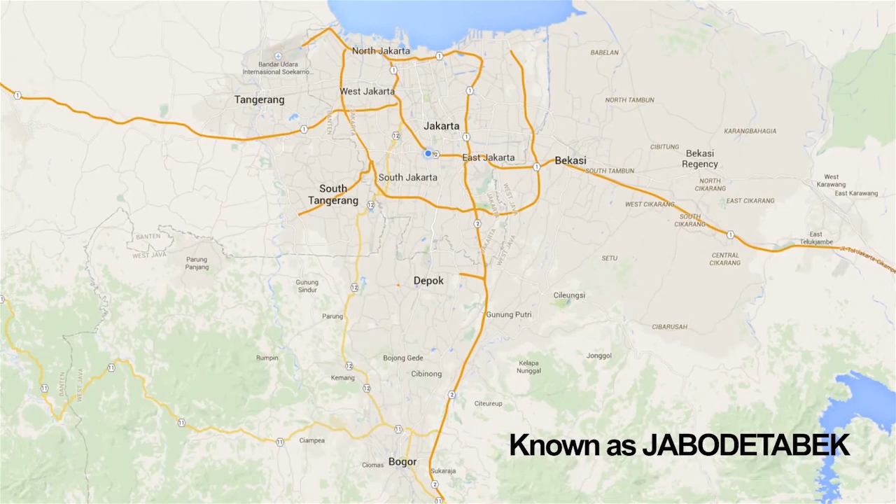It is the most populous city in Indonesia and in Southeast Asia, while the Jakarta city area is 664 square kilometers. Known as Jabodetabek, a name formed by combining the initial syllables of Jakarta, Bogor, Depok, Tangerang, and Bekasi, it is the second largest in the world. Yet the metropolis's suburbs still continue beyond it.

With 28 million people in the metropolitan area, nearly 10 million vehicles in daily use, and a limited rapid transit system, Jakarta is strained by transportation problems. The alternative solution to Jakarta's transportation problem shall be providing mass rapid transit that is environmentally friendly and

powered by electricity. By adopting the system utilized in other countries such as Singapore and Japan, the Government of DKI Jakarta established the organization that is fully responsible for all activities, from engineering service and construction through operations and maintenance. The organization is PT Mass Rapid Transit Jakarta.

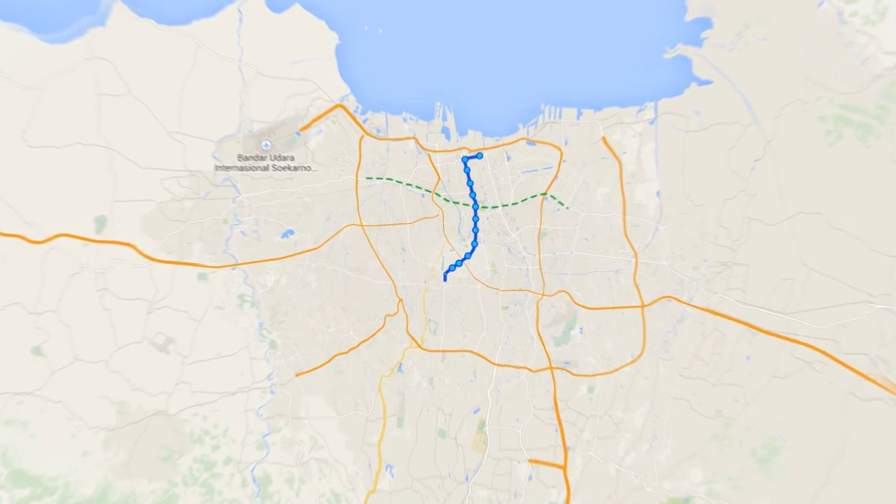Rail-based MRT Jakarta will stretch over 110.8 km of Jakarta roads, consisting of a South-North corridor of about 23.8 km and an East-West corridor of about 87 km. This project is funded through a STEP loan by JICA and includes the first subway line in Indonesia.

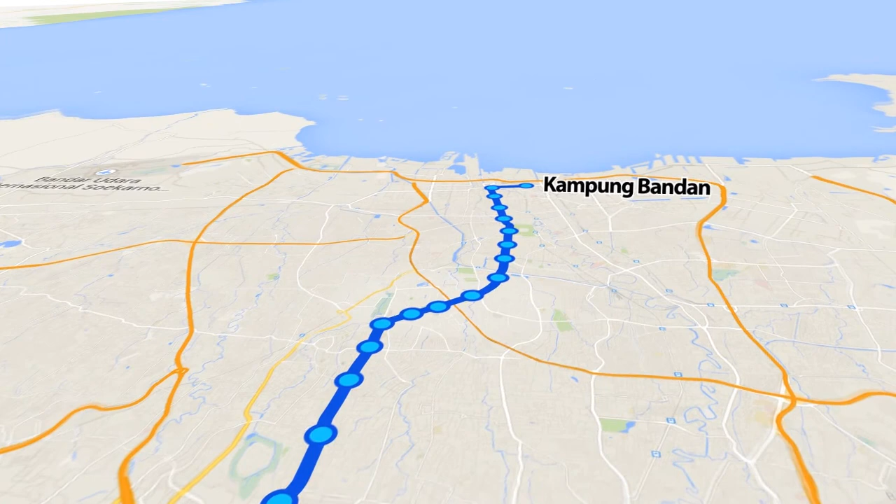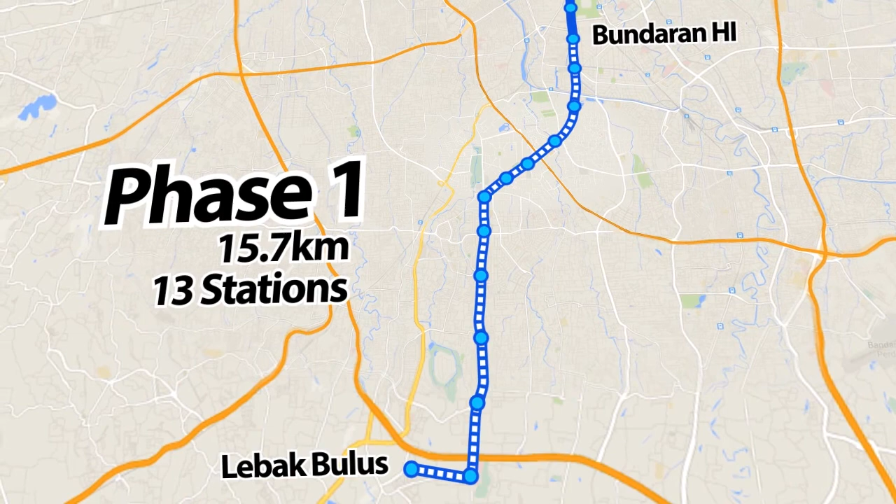The construction of the South-North corridor that stretches from Lebak Bulus to Kampung Bandan will be carried out in 2 phases. Phase 1 will connect Lebak Bulus with Bundaran HI over a 15.7 km railway with 13 stations, 7 elevated stations and 6 underground stations, which is targeted to operate by 2018.

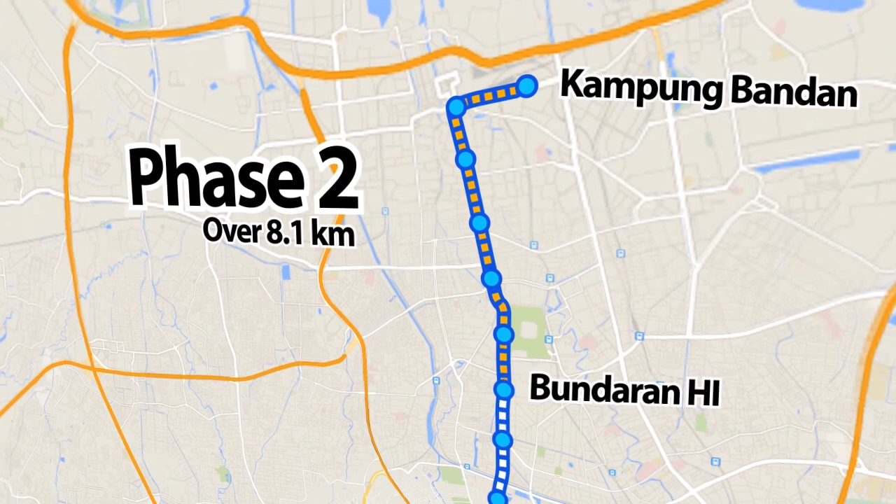Phase 2 will expand the South-North corridor from Bundaran HI to Kampung Bandan over an 8.1 km railway, whose construction will have been initiated before Stage 1 operates. The construction of MRT-J Phase 1, which includes 13 stations and 6 packages, has commenced since August 2013.

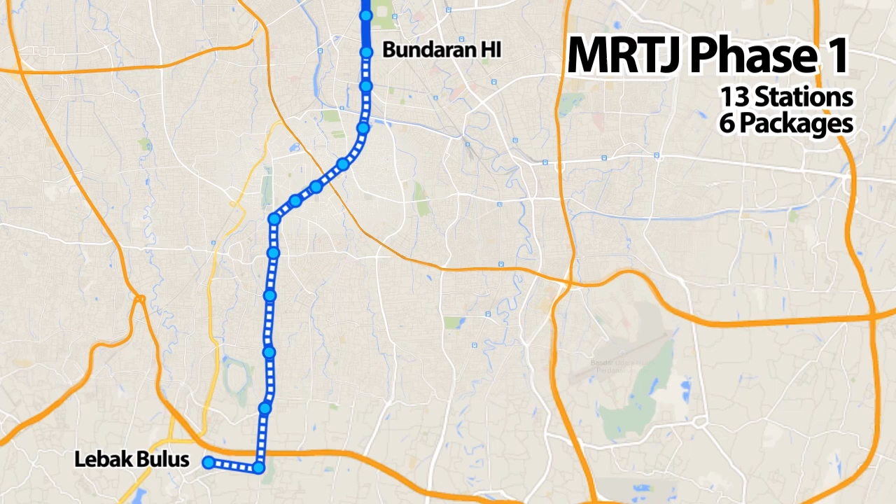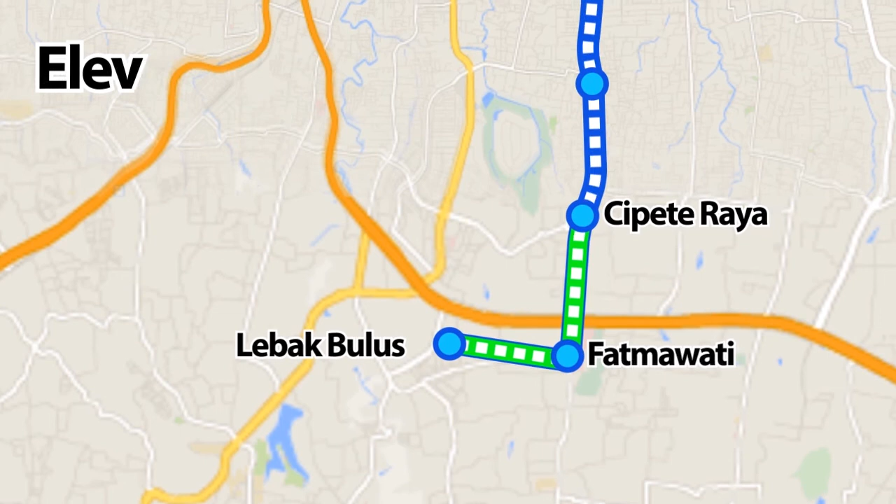Elevated packages CP101 and CP102 consist of Lebak Bulus, Fatmawati, and Cipete Raya stations along 5.95 km. Elevated package CP103 consists of Haji Nawi, Blok A, Blok M, and Sisingamangaraja stations along 3.84 km.

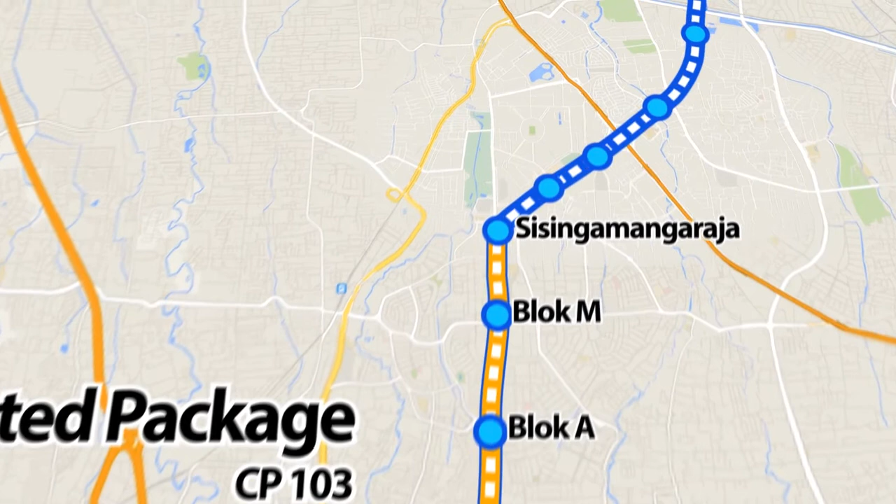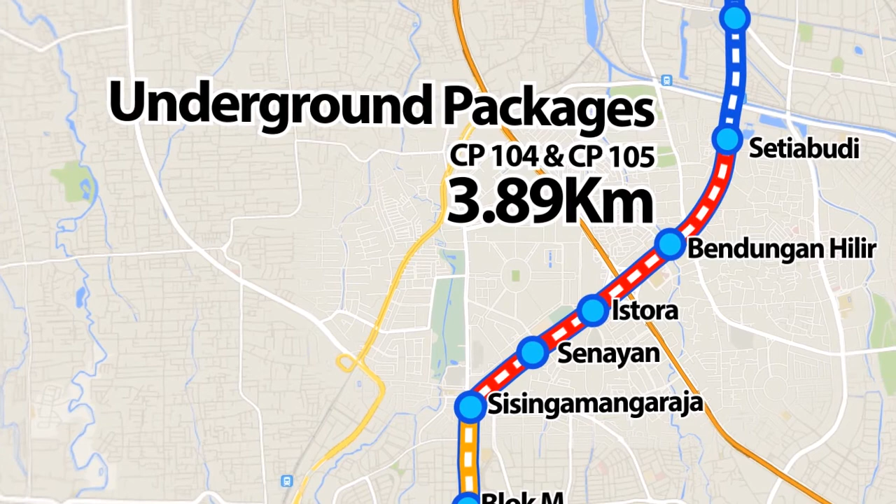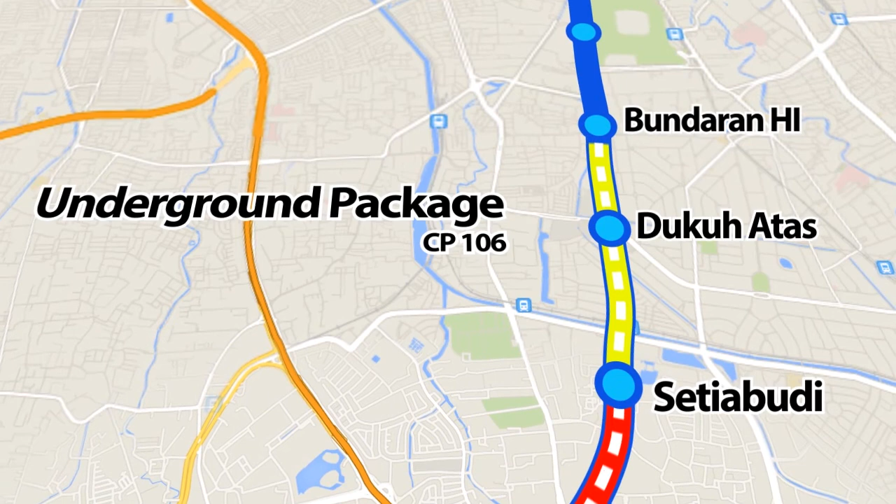Underground packages CP104 and CP105, consisting of the transition area, Senayan, Istora, Bendungan Hilir, and Setiabudi stations along 3.89 km, are carried out by Shimizu Obayashi Corporation from Japan, and Wika and Jaya Konstruksi from Indonesia. Underground package CP106 consists of Dukuh Atas and Bundaran HI stations along 2.02 km.

SOWJ is the abbreviation of the Shimizu Obayashi Wika and Jaya Konstruksi joint venture, which constructs the CP104 and CP105 packages. Those packages are underground packages that include transition area, station and tunnel construction with a total length of 3.89 km.

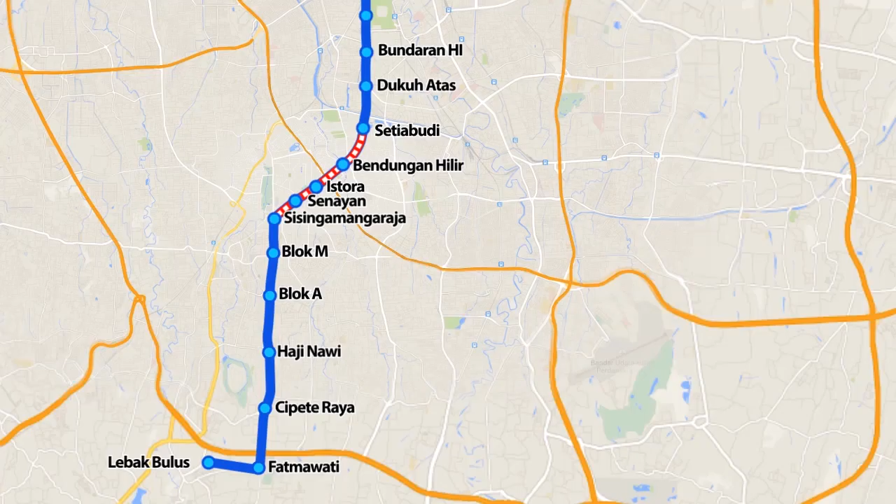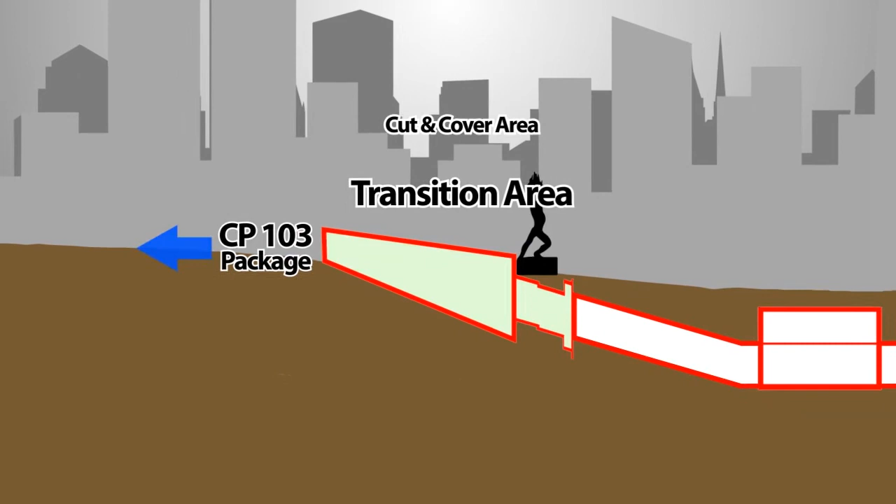The transition area, or cut and cover area, will be located from Sisingamangaraja Road to Bundaran Senayan along 460 meters. This area is a transition from the elevated structure of the CP103 package to the underground structure of the SOWJ packages, which will be constructed by the soldier piling method.

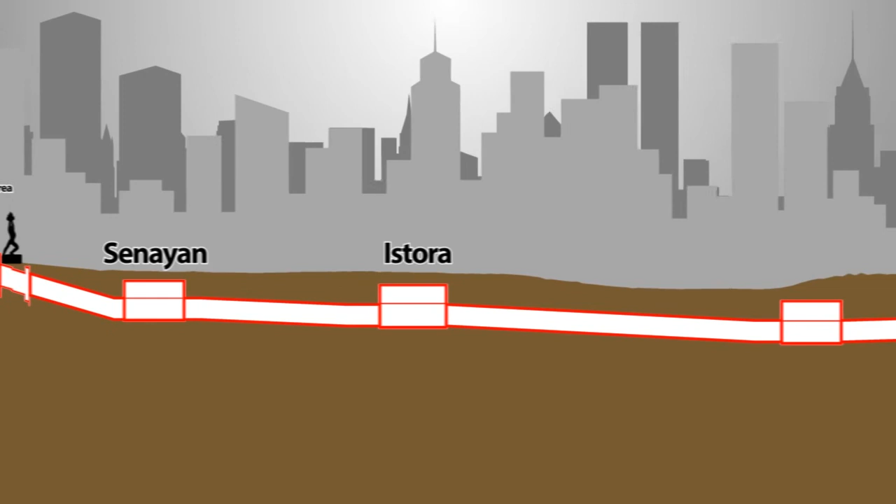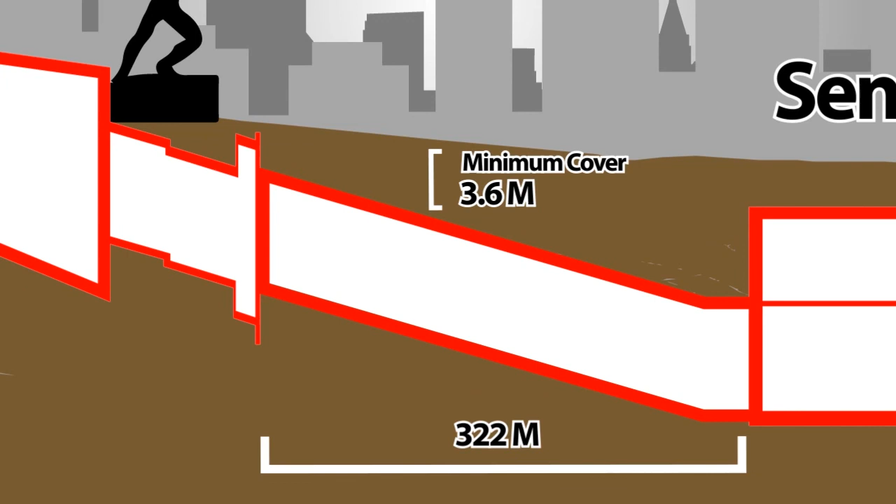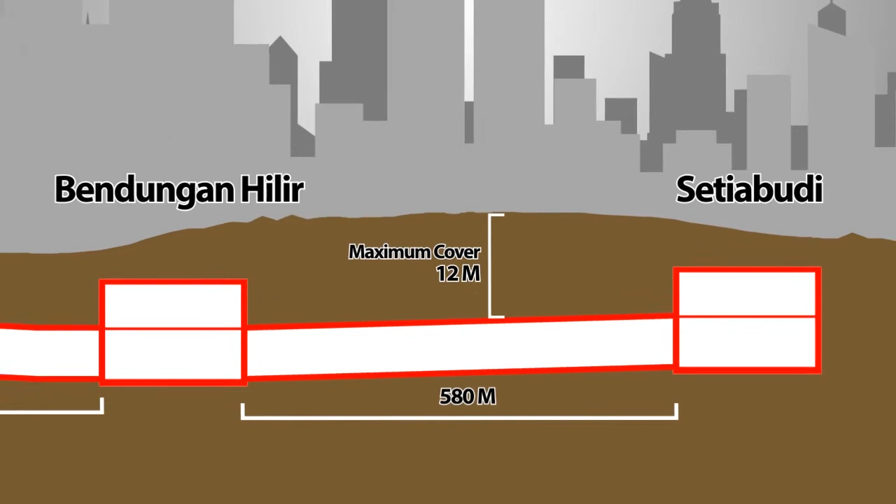There are 4 stations, Senayan, Istora, Bendungan Hilir, and Setiabudi, that will be established. The distance from the cut and cover to Senayan station is 322 meters. The distance between Senayan and Istora station is 630 meters. The distance between Istora and Bendungan is 1080 meters, and from Bendungan to Setiabudi is 580 meters. The length of each station is 200 meters except for Istora station, which will be 220 meters.

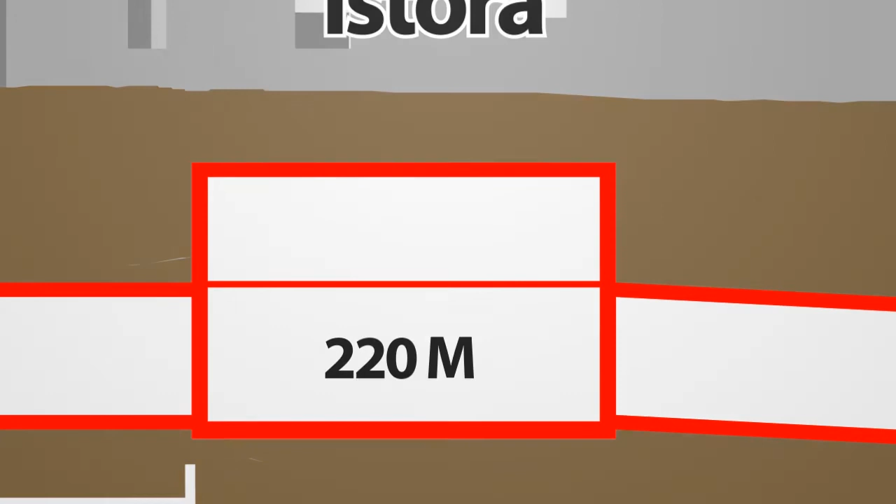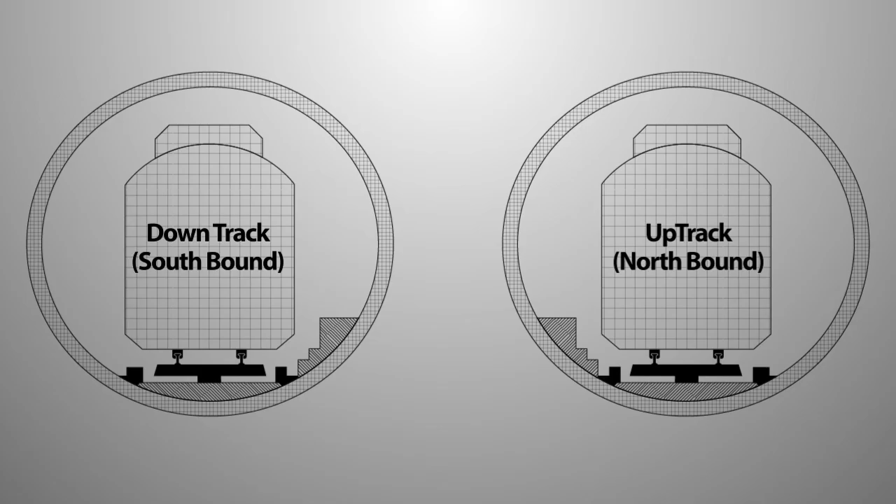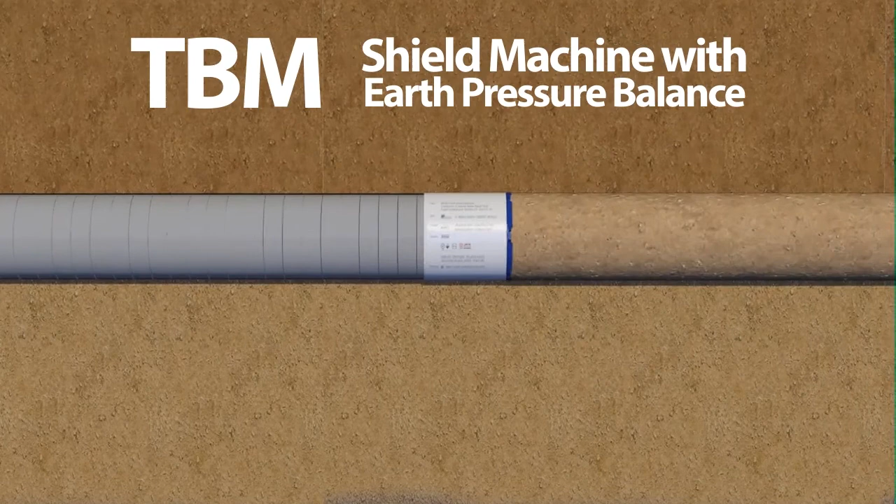The tunnel structure is for the railway of the MRT-J train. It consists of 2 lanes, the down track or southbound and the up track or northbound lane. This facility will be constructed by tunnel boring machine, also known as TBM. The TBM used is a shield machine of the earth pressure balance type. The required inner diameter of the tunnel is 6,050 millimeters. The tunnel is completed with reinforced concrete segments as the supporting lining structure.

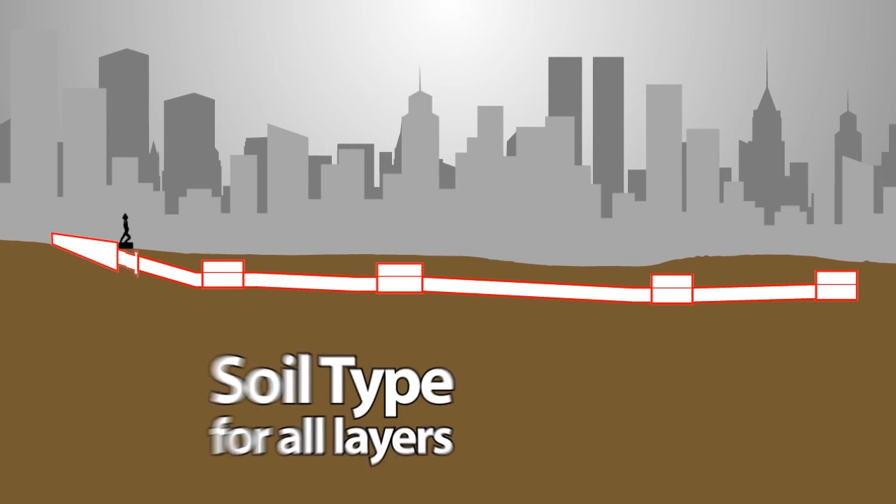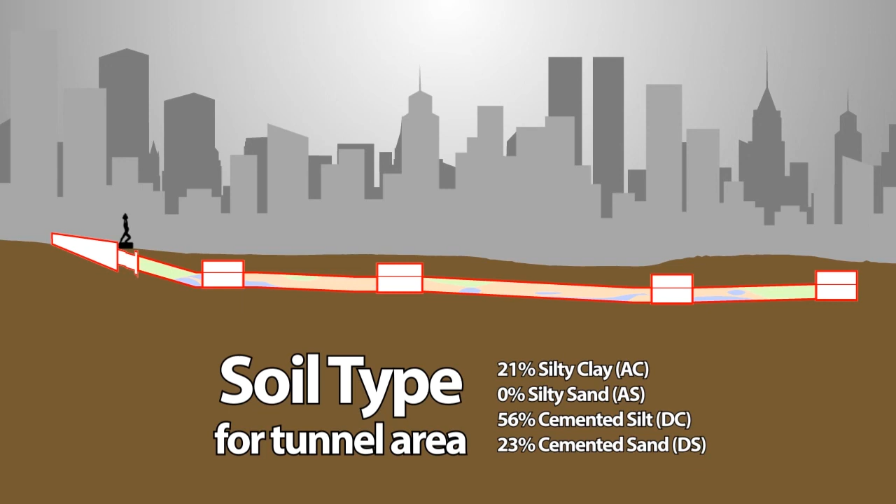According to the geotechnical report for the CP104 and CP105 project location, the tunnel alignment along Jalan Sisingamangaraja through Jalan Sudirman consists of 21% silty clay, 0% silty sand, 56% cemented silt, and 23% cemented sand soil types. This soil condition affects the type of TBM utilized for this project. The majority soil layer passed through by the TBM is cemented silt. Due to that condition, the TBM selected for this project is an earth pressure balance shield machine.

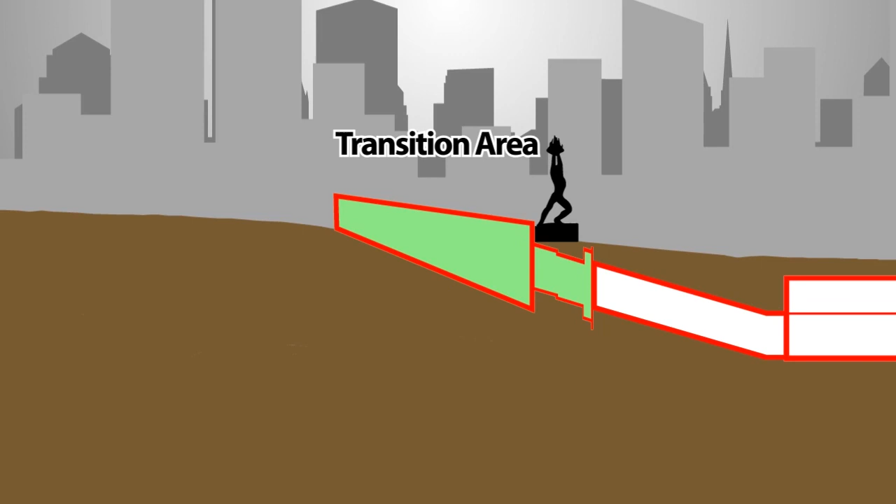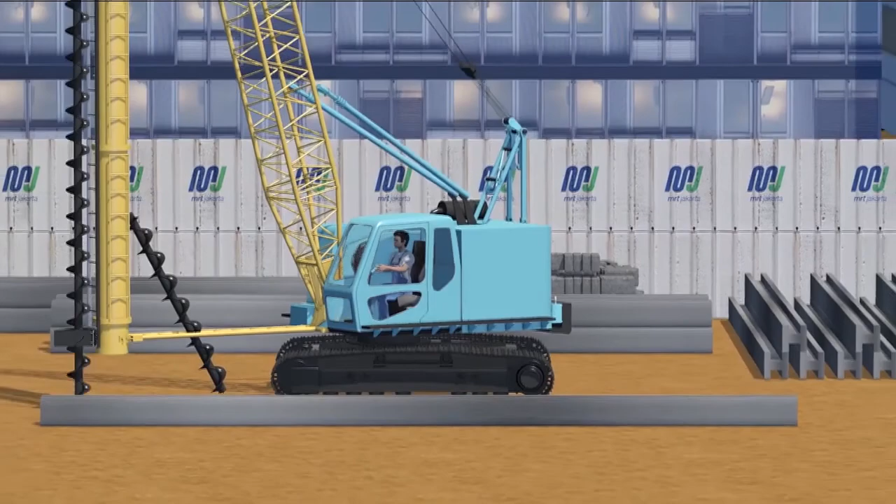The cut and cover area is located on Sisingamangaraja Road, bordering the CP103 package, until the Pemuda Statue at Senayan. This area is the transition from elevated structure to underground structure. The cut and cover area is constructed using the soldier piling method. H-beams will be used as the major material of the soldier piles.

Before driving the piles, the position, alignment and orientation of the piles must be established. Piles will then be driven by a vibrator hammer unit into the marked position. Piles shall be driven in a straight vertical position, otherwise driving will be difficult. All piles will be inspected for excessive camber or sweep.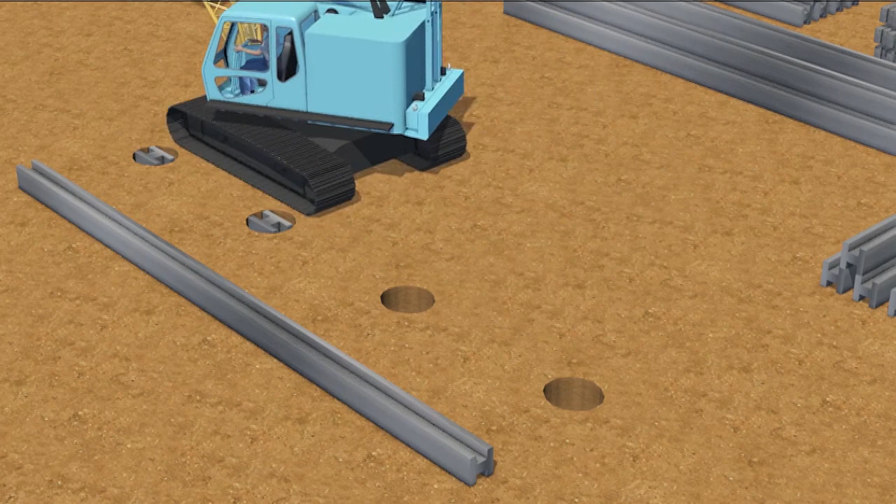After completing the soldier piles, excavation of the first layer will be carried out, and then a temporary deck and the first waler strut will be installed. Excavation of the second and third layers to the base will be continued. The bottom layer will be completed with blinding stone and lean concrete. The base slab concreting process can then be started.

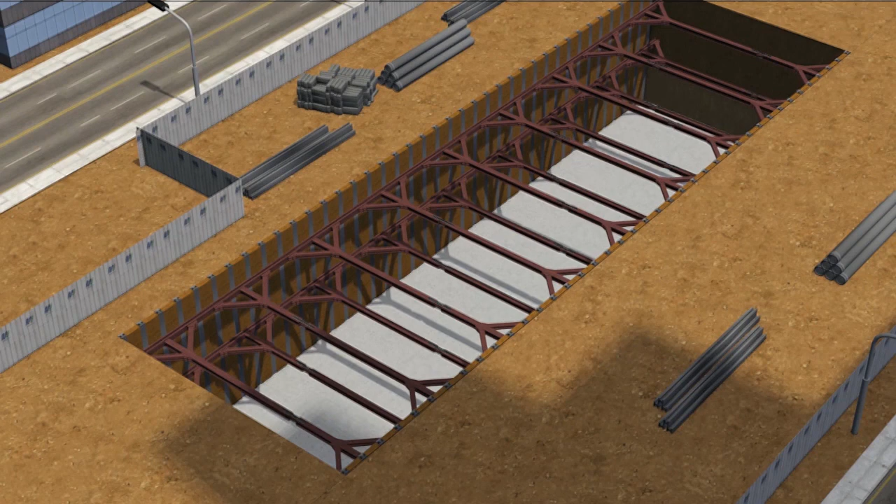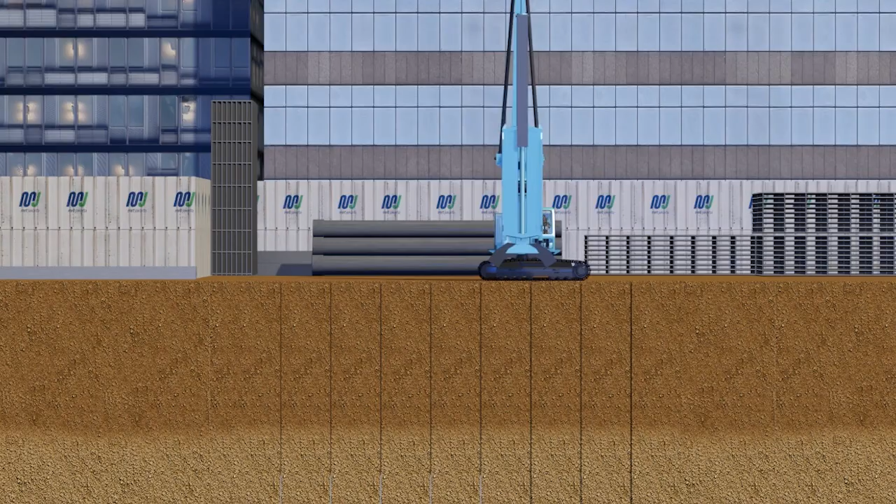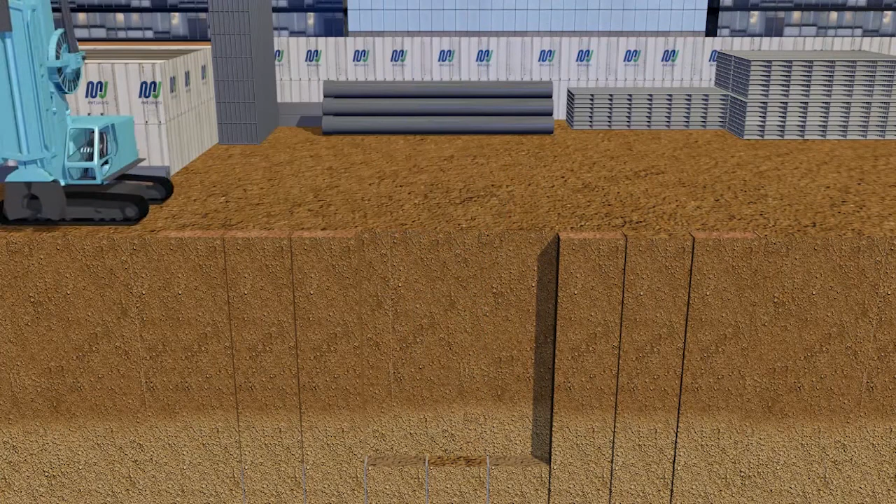The station is constructed using a top-down method. In order to retain the soil and water pressure while commencing a deep underground excavation for main station boxes, diaphragm walls will be constructed. The trench is excavated using a mechanical and hydraulic clamshell, and then a reinforcement bar cage can be lowered down into the excavated area. The next step is pouring the concrete, which is carried out by Tremie method. This cycle is repeated for all four sides of the station.

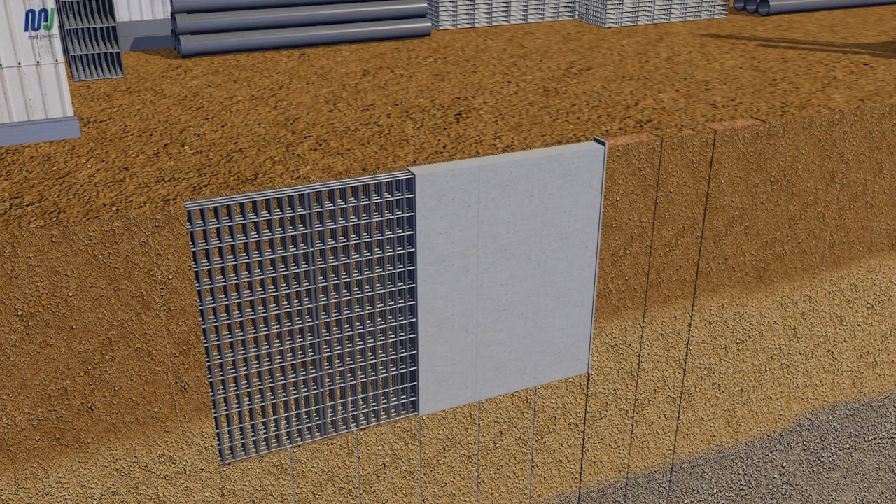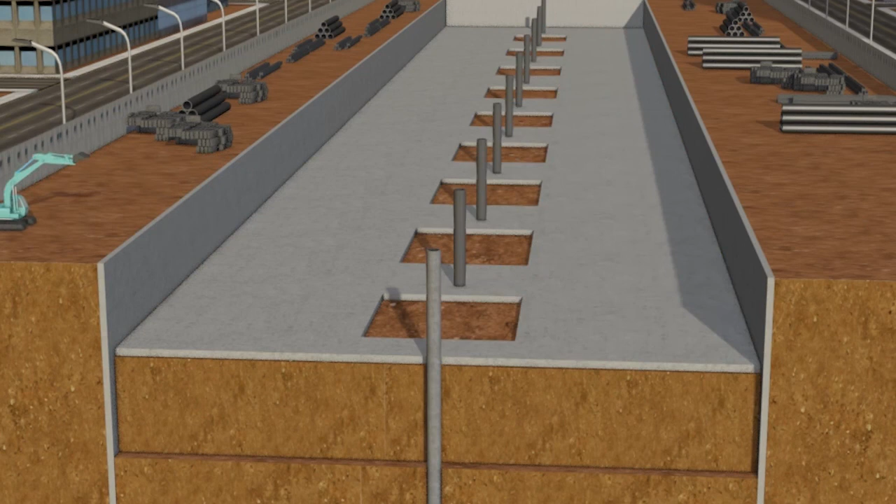The diaphragm walls will function as temporary retaining walls during construction and also as a permanent retaining wall for the station structures. Before starting the excavation process, king posts must be installed as a temporary support for the roof and floor slabs. The first excavation will be conducted and followed by the casting of roof slabs. With openings around the king posts, the second excavation can be conducted.

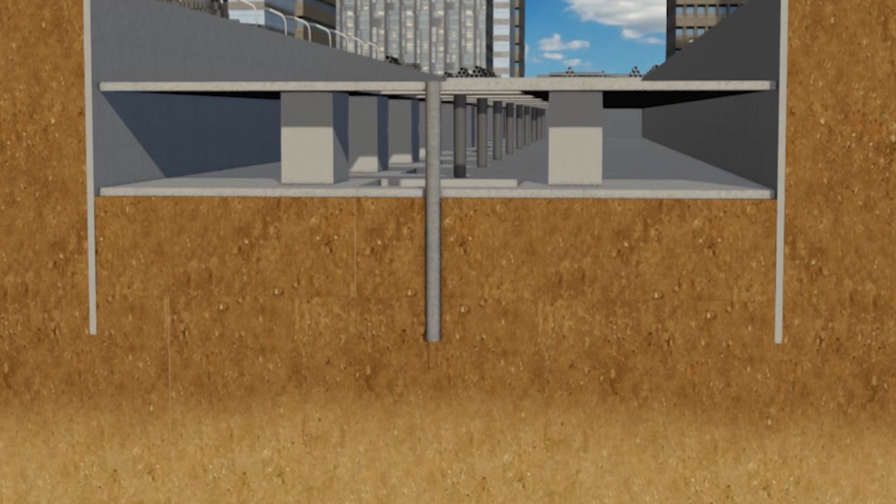After installing the concourse slab, a concourse column will be cast, and then the third excavation can be conducted. Before casting the base slab, blinding stone and lean concrete will be installed. The final process is backfilling the roof slab with soil and compacting it by grader and vibro roller.

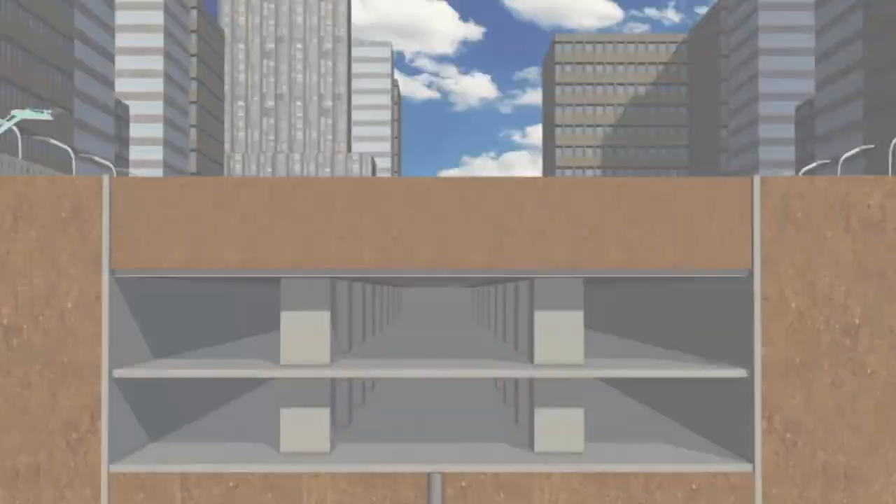The EPB shield machine is not designed as a whole complete component. Shield machine assembly is located at the launching shaft beneath Pemuda Statue Senayan. This machine is formed by some parts which have special functions for the tunneling work. When the TBM is completely assembled, it will be positioned facing the tunnel eye seal. The TBM will then slowly proceed forward. The tunnel eye will be broken by the TBM roller cutter. The TBM will then break out of the launching shaft and enter into the ground.

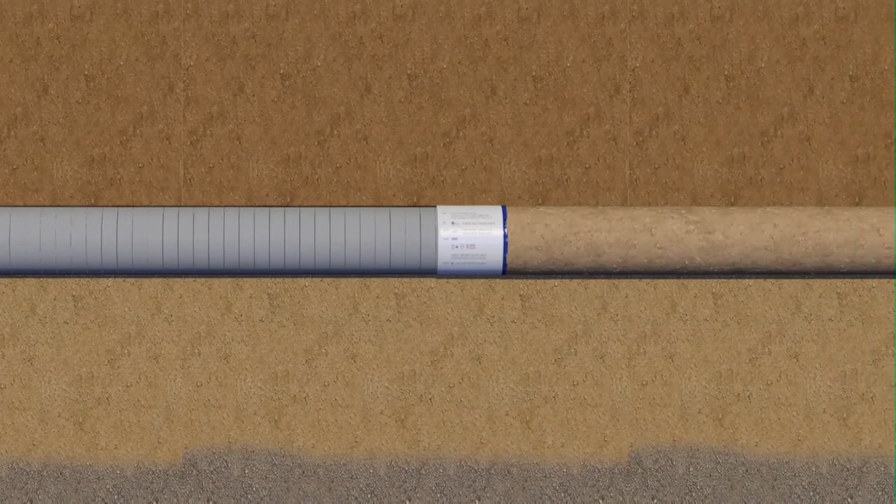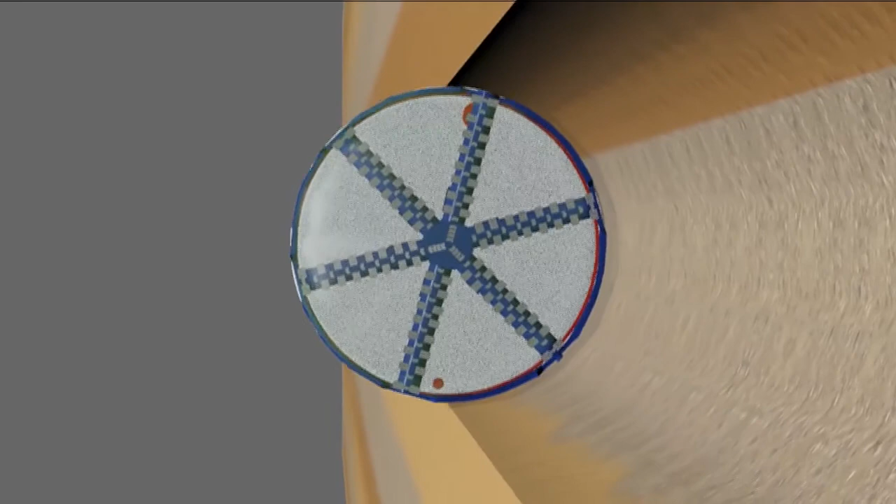The cutter head is the main component for excavating the soil. This project requires a circular spoke-type cutter head structure and flat front shape. To simplify the excavation process, a chemical injection will be required to produce a soil excavation result that is suitable for discharge by the screw conveyor. The chemical will be injected both at the face of the cutting wheel and within the cutting chamber. This chemical will be mixed with excavation material by rotation of the cutting wheel and the mixing arms.

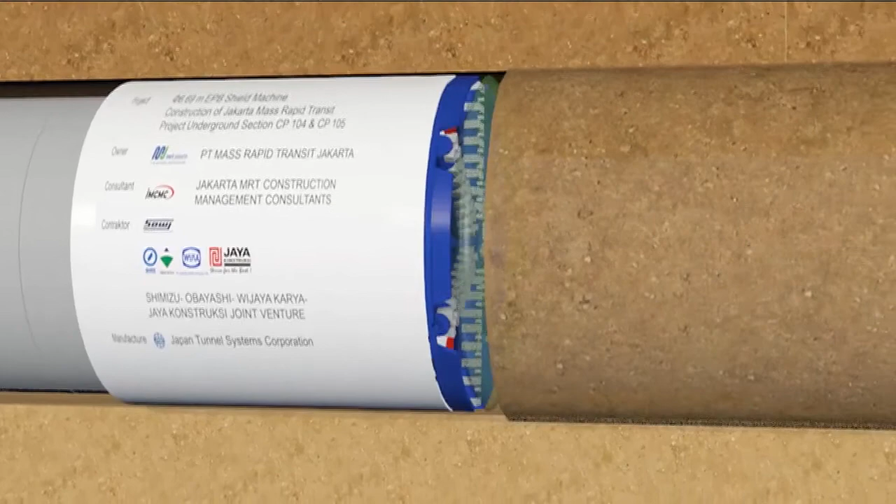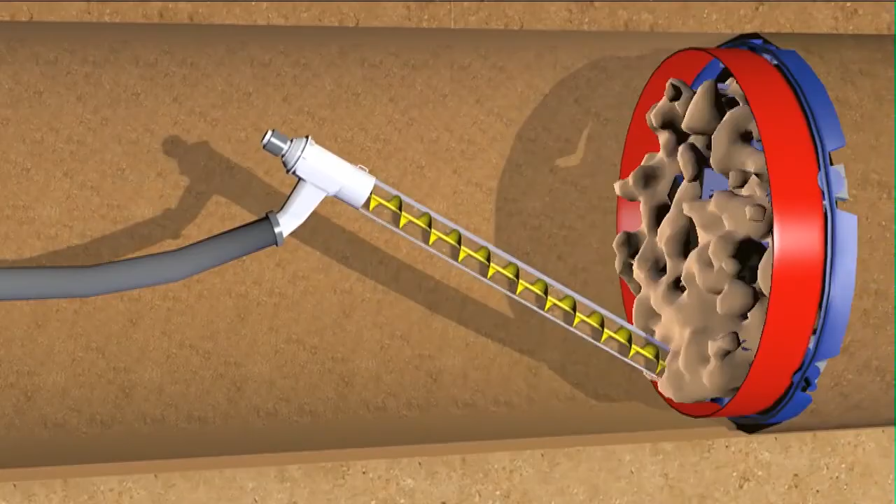After the cutter head rotates to excavate the soil, the soil disposal will be transported to a screw conveyor. The screw conveyor is used to deposit excavated material from the cutter head chamber onto the hose along the backup car. Soil disposal as a result of excavation will be transported from the screw conveyor to the hose system. The screw conveyor has one gate for muck disposal passed into the 14-inch hose. This hose will end at backup car number 1.

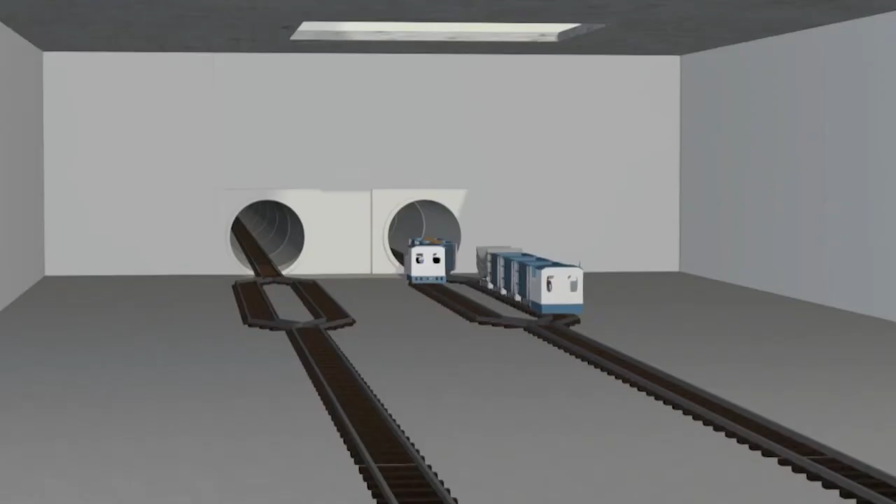Soil disposal from the backup car area will be delivered by muck car to the cut and cover area. The full muck car will be hauled back to the opening by locomotive, hoisted to the surface and emptied into the muck pit. Another locomotive will go back to the TBM carrying the concrete segments and 3 empty muck cars.

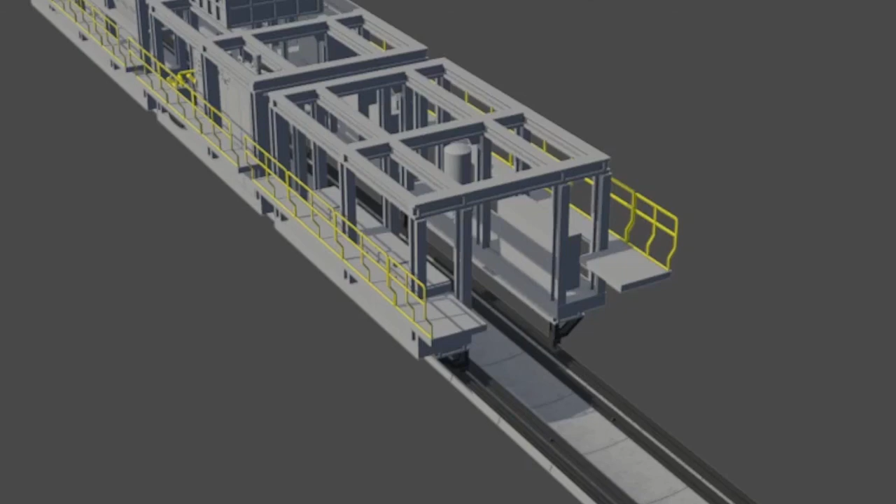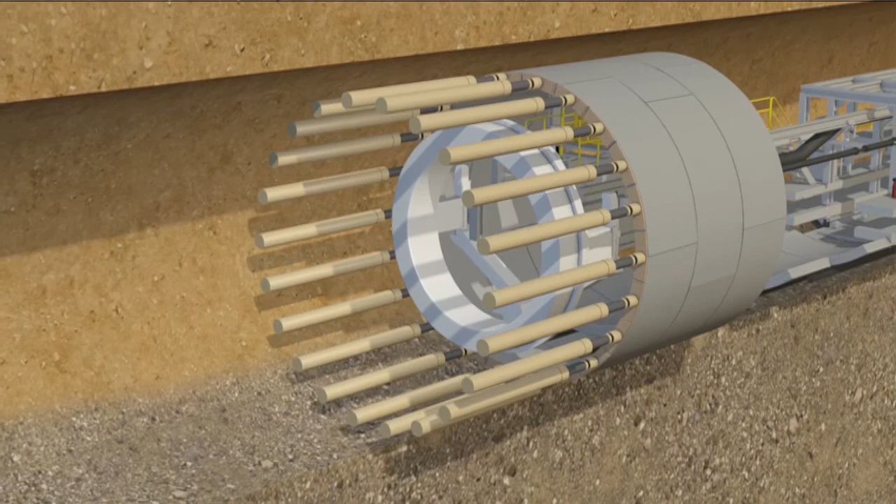After the excavation cycle is complete, the shield jacks are left locked onto the previously built tunnel rings to keep the TBM tied into the tunnel face, and only enough shield jacks will be removed to allow the placement of one tunnel segment at a time. The segment erector can pick up the first segment from the erector pickup area and place it in the correct position in the invert of the tail skin. Each segment is 1.5 meters wide with 25 centimeters thickness.

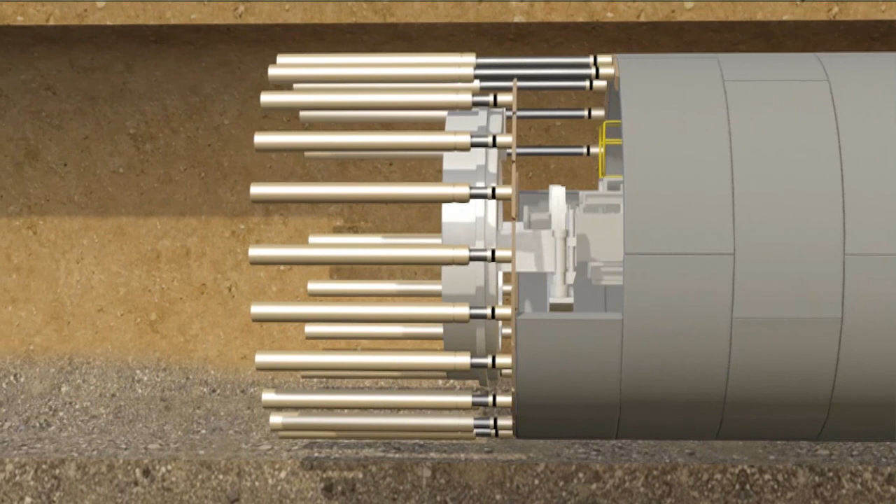The segment hoist is then operated to place the remaining segments into the erector pickup area. The ring build is completed by inserting the key segment and tightening all the segment bolts. After the 6 segments have been installed properly, the shield jacks will then push forward and the excavation will continue.

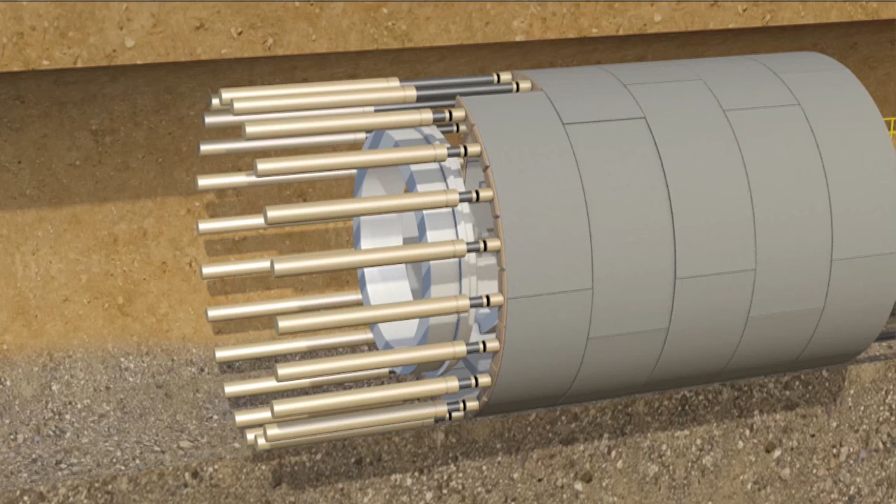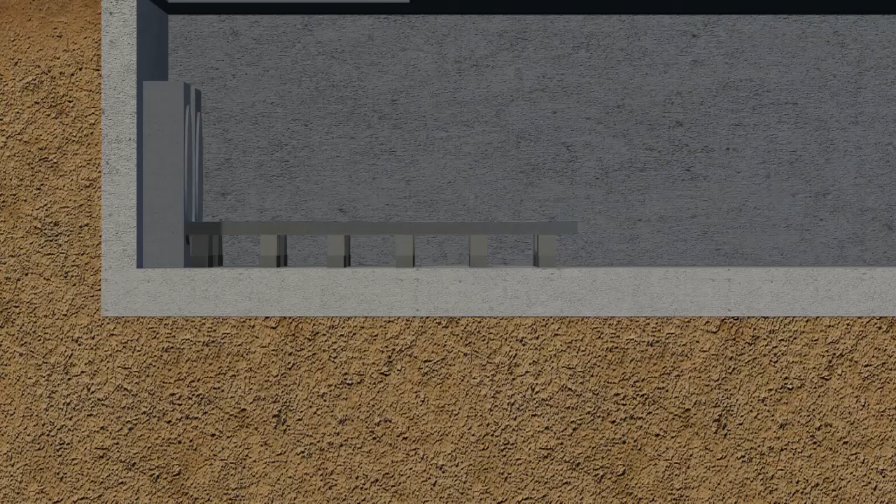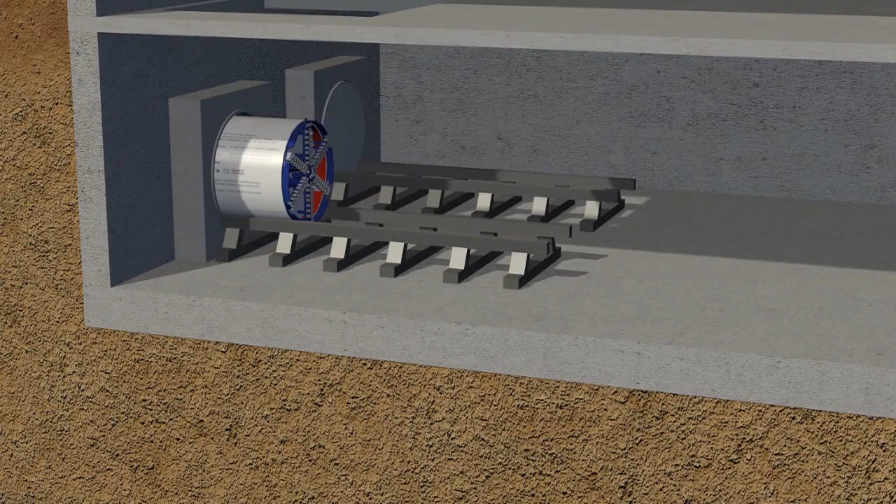The tunnel is finished by installing a concrete invert, which is a permanent structure for the bed track of the MRTJ railway. When the machine has reached a designated distance, the machine will arrive at stations. The final arrival is at Setiabudi station. And then the machine can be dismantled. One by one, the machine parts will be hoisted up to the surface.

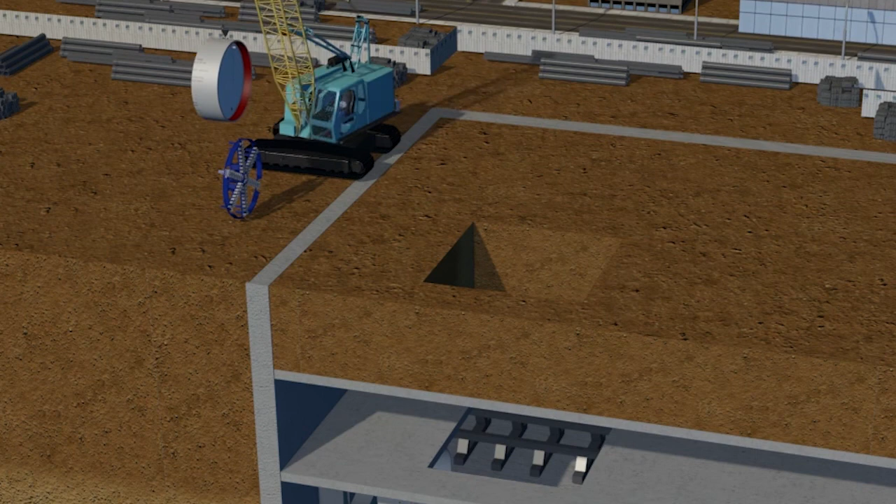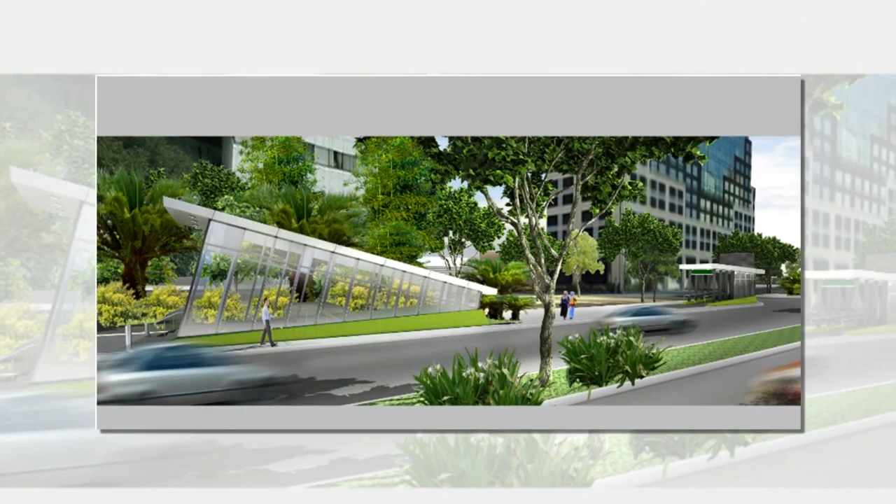This indicates that the target of this operation is for MRT Jakarta to be the primary alternative of public transportation. The final impact of MRT Jakarta will be to reduce the level of traffic jams and pollution in Jakarta. Comfortable and safe travel will be experienced by Jakarta citizens with this MRT Jakarta operation.